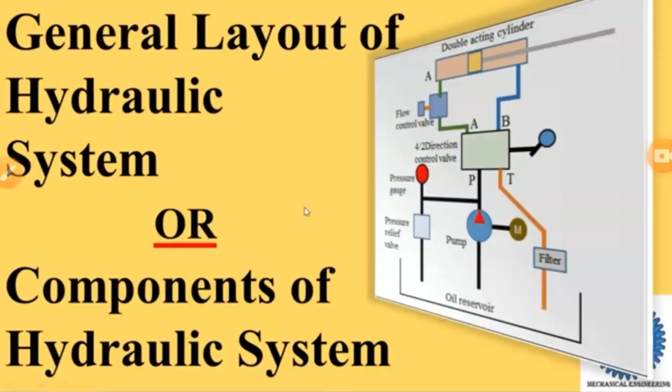Systems. So in hydraulic systems, various components are used. The basic hydraulic system has the following components. The first component is the oil reservoir. So here we go with the animation so you can easily understand it. So this is the oil reservoir, in which the oil is stored.

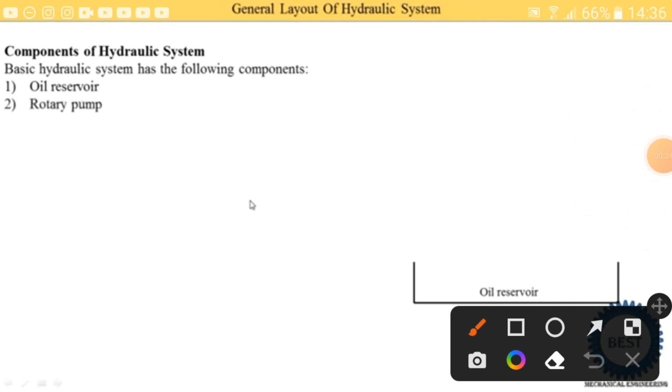Okay. The second component is the rotary pump. So the pump is located here and the pump runs using this electric motor. So here M is written and this is the shaft. Okay. So this shaft transmits the power from the motor to the pump. The pump takes the oil from the oil reservoir, increases the pressure, and then it is supplied to the direction control valve.

The third component is the pressure relief valve. So the pressure relief valve is generally installed at the outlet of the pump because it is generally used to control the pressure. Okay. So it is installed here; that is called the pressure relief valve. The fourth one is the direction control valve. We will understand all these components in detail later on. First we see what the various components are. So we just make the list.

So here you see it is a 4x2 direction control valve. It is a 4x2 control valve, meaning there are 2 inlets and 2 outlets. In total there are 4 ports. Okay. So this is one inlet that is coming from the pump. It is P, and it has 2 outlets. Okay. It is supplied either to this A pipe or to the B pipe. That's why its name is the 4x2 direction control valve.

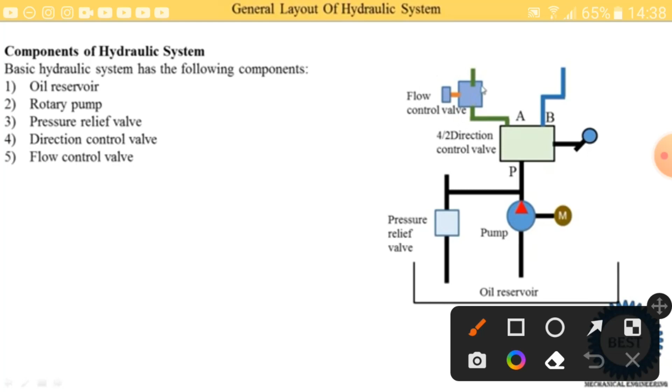Next is the flow control valve. So the flow control valve is provided here. Okay. So here you see it is the flow control valve. The next component is the double acting cylinder. Here you see it is the double acting cylinder. So why is its name double acting? Because inside the cylinder, this yellow component is the piston, and the oil is supplied to both sides of the piston. That's why it is called the double acting cylinder. So oil is supplied to either the A side or the B side. Okay, or it is supplied on both sides.

The next component is the pressure gauge. The pressure gauge is also installed at the outlet of the pump. So here you see it is the pressure gauge. And the last component is the filter. So here you see this is a 4x2 control valve. Okay, so here the 4th port is provided and its name is T. Then this return oil is supplied to this filter here. Okay, so this component's name is the filter.

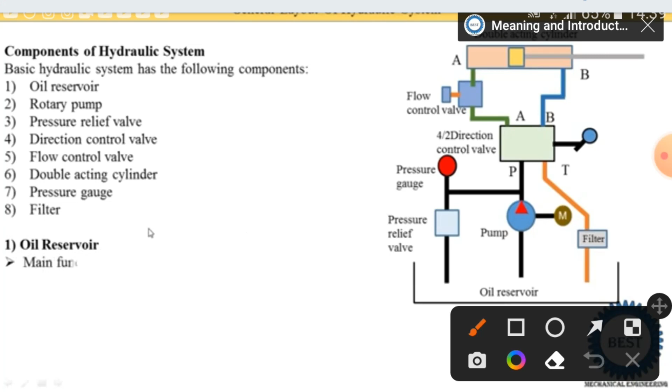Okay, in some books the filter is provided at the inlet of the pump. In some books it is provided at the outlet of the pump. Sorry, not the outlet, but at the return pipe. Okay, so if you see the filter here at the inlet of the pump, this is also correct. Now we understand all the components in detail. The first component is the oil reservoir. Okay, so here in this image you see the oil reservoir is provided at the bottom.

So the main function of the oil reservoir is to store a sufficient amount of hydraulic oil in the system. It is generally used for the storage of oil. Okay, in a bike or car, we store petrol or diesel in our tanks. So similarly, it is a storage place for the oil, because in hydraulic systems we know that liquid is used, and generally we use oil as the liquid. Okay, and in pneumatic systems we use air.

Apart from storing the oil, it also has some other important functions. The first one is to cool the hot return oil. Here you see the return oil is coming. The return oil temperature is increased in these various components, because in the pump its pressure is increased. With this pressure its temperature also increases, and due to the friction in the different pipes and components, its temperature also increases. So the return oil temperature is higher, so temperature reduction is required, and it is carried out in the oil reservoir.

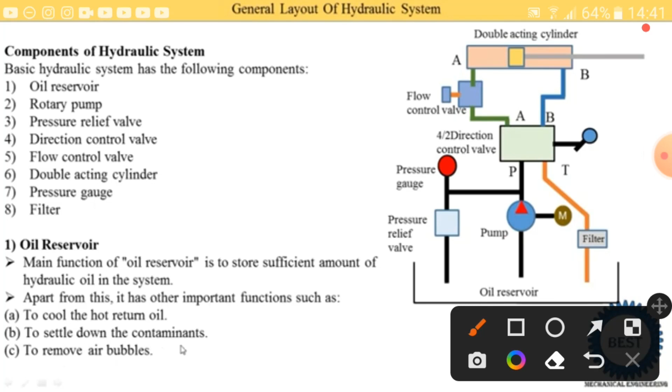The next function is to settle down the contaminants. Due to wear and tear, some of the parts wear out. Okay, so these metal particles come out with the oil. So we need to remove them. This is called removing or settling down the contaminants. Next, to remove the air bubbles. Why are air bubbles created in oil? When the temperature of the oil increases, there is a possibility of bubbles being created inside the oil. So we need to remove these air bubbles from the system.

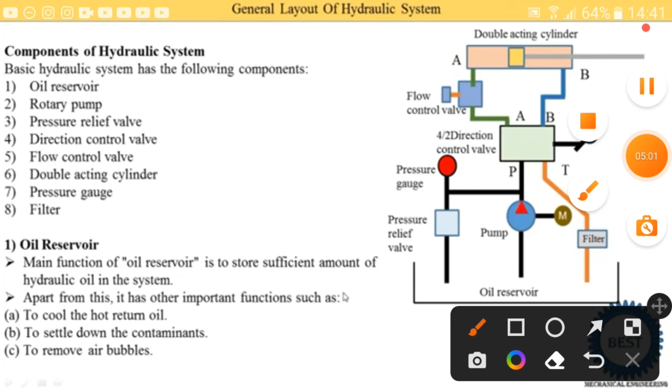Pump. So why is the rotary pump required in an oil hydraulic system? We require it to increase the pressure. Without increasing the pressure, oil is not able to create much force. So if we increase the pressure, then the force is increased.

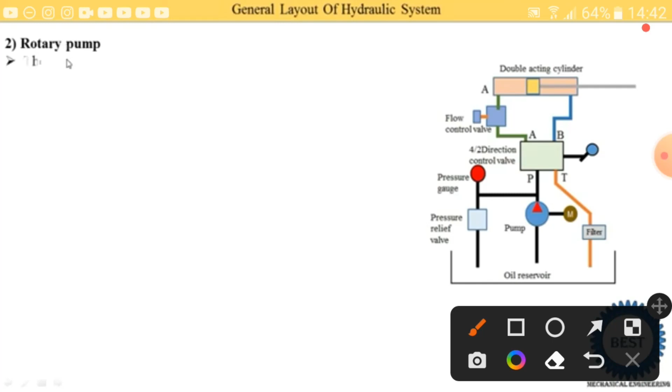The function of the rotary pump is to pump hydraulic oil to the hydraulic circuits. The pump sucks the oil from the oil reservoir, increases its pressure, and converts mechanical energy into hydraulic energy. Mechanical energy means the rotation of the shaft. So in a pump, here you see the shaft, and the shaft is rotated. It is called the mechanical energy.

So how do we create the mechanical energy? We generally have electrical energy available. So we supply the electrical energy to the motor. The motor converts electrical energy into mechanical energy, and this mechanical energy is supplied by the shaft to the pump, and the pump converts this mechanical energy into hydraulic energy.

The rotary pump is a positive displacement pump. Various types of pumps are available, so it is not necessary to use the rotary pump in hydraulic systems. You are able to use another type of pump as well. But in this image we are discussing the rotary pump, which is a positive displacement pump, and it can deliver a constant flow even at high pressure. So the rotary pump delivers the oil at a constant flow even at higher pressures.

The third component is the pressure relief valve. Let's understand the meaning of the words pressure relief valve. Relief means reducing something. Here, with relief, the word pressure is used. So the pressure relief valve is used to reduce the pressure of the oil. It is an important component which is required for every positive displacement pump. Here you see that the pressure relief valve is attached to the outlet of the pump.

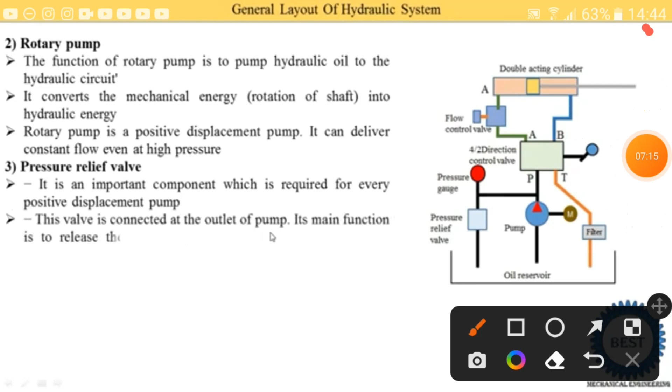This valve is connected at the outlet of the pump, and its main function is to release the oil back to the tank when the pressure increases beyond the preset value. Suppose we require 10 bar pressure in our hydraulic circuit, but due to some circumstances the pump delivers the oil at 12 bar pressure. Our desired pressure is 10 bar, so this pressure is reduced by using the pressure relief valve.

First the pressure is measured by using this pressure gauge, to see if the pressure is higher than required. We require 10 and the pressure is 12 bar. Then the pressure gauge signals the pressure relief valve, and the pressure relief valve takes some quantity of the oil back and supplies it to the oil reservoir. That way the pressure at the outlet of the pump is reduced from 12 bar to 10 bar.

Next is the direction control valve. From the name you can understand the meaning of direction control valve. It changes the direction of the oil or guides the oil in a proper direction: you are going in this direction, you are going in that direction. So the direction control valve tells the oil to move in these directions.

It is not necessary that the oil coming out from the pump is only supplied to one single system. Here you see we use the double acting cylinder, so we need to supply the oil in two directions, either through pipe A or through pipe B. How the oil goes, we decide by using the direction control valve. Sometimes oil is supplied through pipe A, sometimes through pipe B. So it controls the direction of flow of oil, by which it performs extensions and retractions of the actuators.

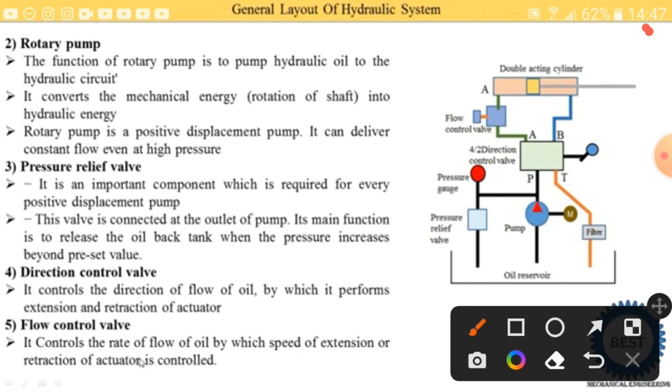Actuators produce the work. What is the work? Work means it produces some mechanical work. And we supply energy to these actuators. So this double acting cylinder is our actuator, to which we supply the hydraulic energy. So what happens in actuators? Hydraulic energy is converted into mechanical energy.

And here in the pump, what happens? We supply mechanical energy and it is converted into hydraulic energy. So in our system we take the oil from here, that is the hydraulic energy, and here we get this mechanical energy, and here we also get the mechanical energy in the output.

There are two types of actuators. One is the linear actuator and the second is the rotary actuator. So here you read this word, double acting cylinder. This is our linear actuator, and the rotary actuator is called the motor. In the next few chapters you will hear this word actuators. What are the various types of actuators?

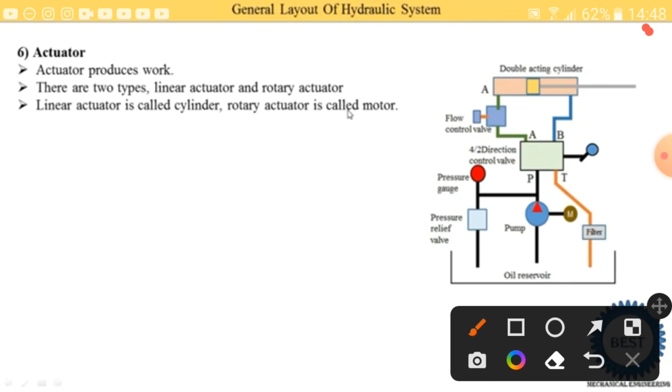So the hydraulic motor is also there. You have only heard the name electric motor, but the word hydraulic motor is also coming in a few chapters. So what is the meaning of hydraulic motor? It is the rotary actuator. So the rotary actuator is also called the hydraulic motor.

Double acting cylinders develop force and motion. Here we supply some quantity of oil and it's converted into mechanical motion. So this piston reciprocates. With this piston, the connecting rod also reciprocates, and here some force is created. So how much force is developed? There is an equation.

Which equation? Force developed is equal to pressure of oil into area of the piston. So here we see that the force developed is directly proportional to the pressure and the area. If we increase the area, force is increased. If we increase the pressure of oil, force is increased. So by increasing the pressure of the oil, we are able to achieve more force.

Suppose we require more force; we have only one option, to increase the pressure of the oil. Because the area of the piston is fixed, we are not going to change it, since it is a fixed component. So if we want more force, we increase the pressure of the oil supplied to the actuators. And in actuators, the hydraulic energy we supply is converted into mechanical energy.

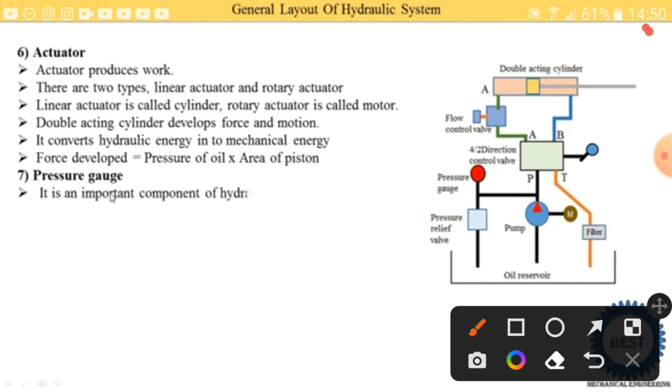The next component is the pressure gauge. You already know the function of the pressure gauge. It is an important component of the hydraulic system. It shows the pressure reading. Why is it important? We have not just written that it is important; there are reasons why it is an important component.

Because without measuring the pressure, the pressure relief valve does not operate. And if the pressure is increased, there are chances of collapse of the system, damage, or leakage inside the system. So the most important thing is to maintain the pressure inside any hydraulic system. Pressure settings are made by looking at the pressure gauge. Without a pressure gauge, it is not possible to make the pressure relief valve setting and the unloading valve setting.

So without the pressure gauge, the pressure relief valve does not operate, because the pressure relief valve requires sensing of the pressure, and this sensing is done using the pressure gauge. That's why the pressure gauge is most important.

And the last component is the filter. Its main function is to remove suspended solid contaminants from the oil and provide clean hydraulic oil to the system. So the filter is generally used to remove suspended solid contaminants from the oil and supply clean oil to the system.

In some books the filter is provided in the return pipe, and in some books it is put in the supply pipe of the pump. Both locations are correct. You do not need to be confused about it.